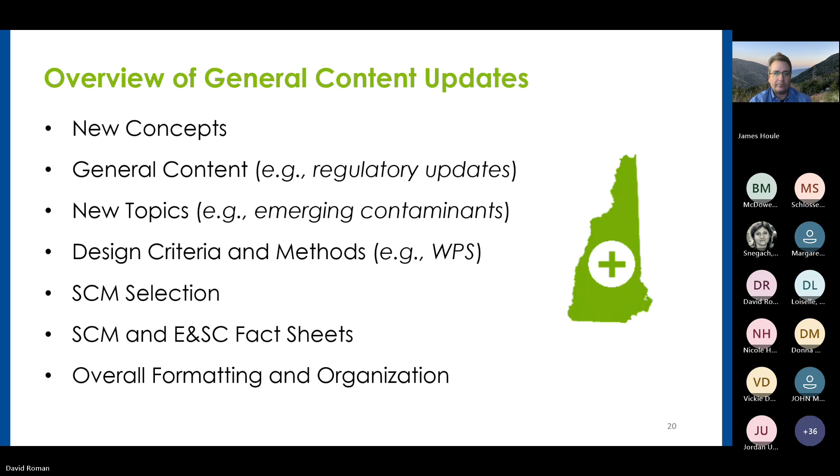Next slide. As far as new concepts, the idea here is it represents what the science is pointing towards as the most effective approaches to manage stormwater. This is guidance, as Deb had mentioned, that can be incorporated into site plan review regulations and other planning regulations and local ordinances that advance water quality goals and help communities meet the challenges of today and future scenarios.

In some cases this represents the future or where the science is going, but in a lot of respects, as hopefully you'll see, it's very consistent with some of the updated documents. In New England, stormwater science changes fast. We're also, in New Hampshire and Massachusetts, non-delegated states, so EPA Region 1 writes our permits for us, and so our permits tend to be more progressive anyway. The guidance in this manual is very consistent with some of those emerging criteria.

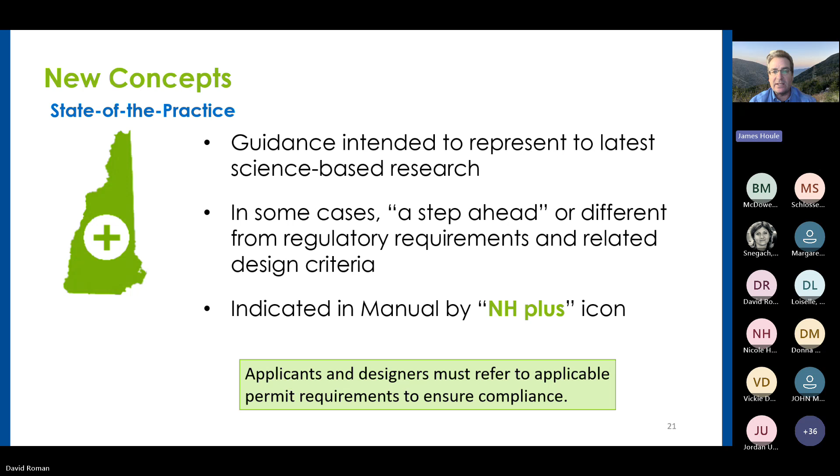We should note that these state-of-the-practice items are identified throughout the manual by this New Hampshire Plus icon. We added that so you understood or were aware that this might go above and beyond what's required. But again, we're looking at this as the most protective elements of stormwater design that are available today. Next slide.

You'll also hear about this watershed protection standard. This is largely guiding on-site stormwater management, or what the old manual referred to as groundwater recharge - that's the primary way to manage on-site rainfall depths. Dave will go into greater detail about what this is referring to. Again, it's very consistent with the updated Mass MS4 permit that came out in 2024. New Hampshire's permit will come out probably sometime this year, and the New Hampshire and Mass permits, at least the existing ones, are almost identical.

So we really feel like this will be very consistent with the new permit as well. And it's also consistent with the recently updated Mass draft manual that has a 1-inch retention standard. We are calling this a watershed protection standard because we're engaging new modeling and up-to-date ways to model this on-site retention. And we develop resources, as you'll see, to help you and guide you through that. So we really hope that we're making this as easy as possible to adopt and provide tools to engineers and designers that are going to be doing this throughout your municipality or throughout your jurisdiction.

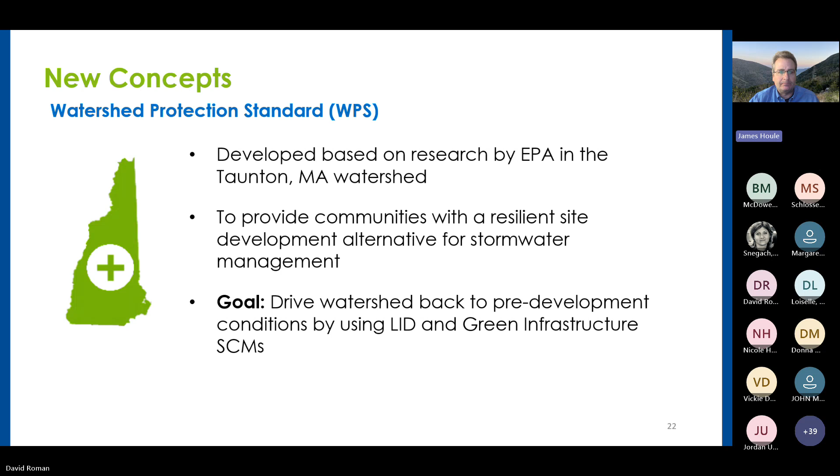Of course, in any updated field, the acronyms are how we measure our success sometimes. We are adopting a new acronym for best management practice, and that's called stormwater control measure. Why? It's mainly because EPA has adopted this as well. And if you look across some of the other updated manuals, they're all moving towards stormwater control measure. It's a little bit more precise. Best management practice is a very vague and open term. These things are still applicable to erosion and sediment control practices, but the structural and non-structural practices for post-construction, which we'll spend the majority of our time going over, needed a little bit of an acronym update. So that's what we're calling stormwater control measures. Next slide.

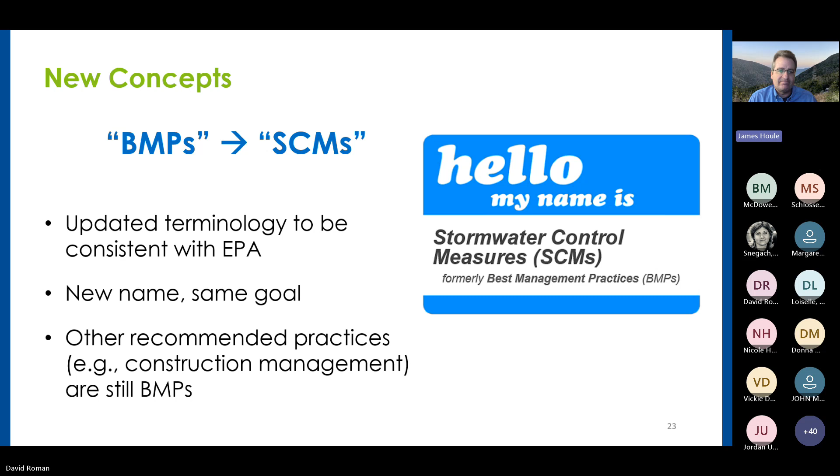And as I mentioned, we don't do this work in a vacuum. It is very integrated with other things that are happening in New England and very tied to the updated alteration of terrain guidance or regulations that are out there. The recently updated construction general permit, the EPA CGP, that governs construction activities, and then the MS4 permit. So the 2017 New Hampshire and 2016 Mass permit, which again, like I said, are written by EPA Region 1 and are almost identical because Mass and New Hampshire are 2 of the 3 remaining non-delegated states.

And as I mentioned, it's also very consistent with the draft 2024 EPA Mass MS4 permit, in addition to some of the other things that we've seen emerge since, like the residual designation or the CII, the commercial, industrial, and institutional permit that came out for the three urban watersheds in Massachusetts, the Mystic, the Charles, and the Neponset. Next slide.

As far as new topics go, we address harmful algal blooms. If we look at 2008, when the manual was written, it was largely focused on sediment. Now, I would say in this manual, one of the most dramatic changes is it's very, very focused on nutrients. So phosphorus in inland freshwater areas and nitrogen in coastal areas, as those tend to be the limiting factors for these harmful algal blooms.

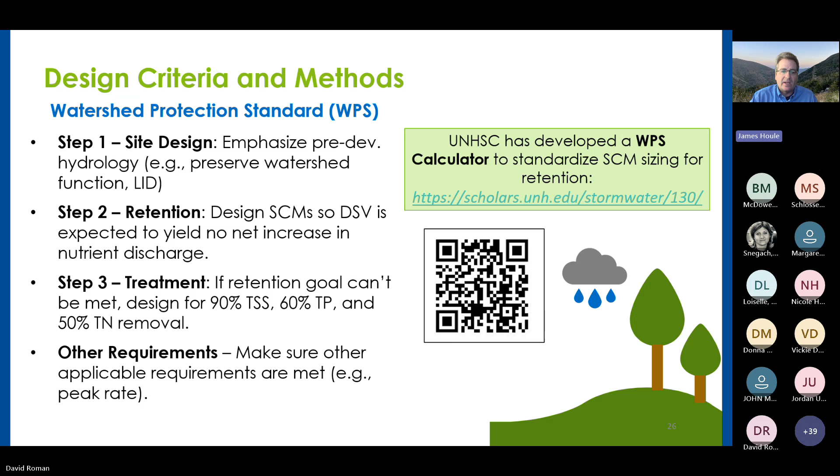So a little bit on the pollutant curves. If you haven't seen these, I'll also drop a link to our website where there's vast amounts of resources that explain the performance curves. These are embodied in Appendix F of the New Hampshire and the Mass MS4 permit, and they really are a more up-to-date way of categorizing and quantifying the load reductions associated with a range of different structural controls.

So if you paid attention to what's really happening throughout the country, you'll see, for instance, the recent Supreme Court case, EPA versus San Francisco. San Francisco was suing EPA over a narrative environmental standard, right? Or maximum extent practicable is something that we talk a lot about here. That's very kind of dubious and hard to nail down. What does that actually mean? And it leads to a lot of ambiguity with respect to the regulated condition.

In New Hampshire and Mass, because EPA Region 1 has been so involved, we're really moving beyond these narrative standards into a numeric criteria. And that numeric criteria embodied in those load reductions, the 90, 60, 50, can all be quantified using these performance curves. So not only are we giving you a numeric criteria, but we're providing ways to calculate that for a range of structural controls across a range of different soil types.

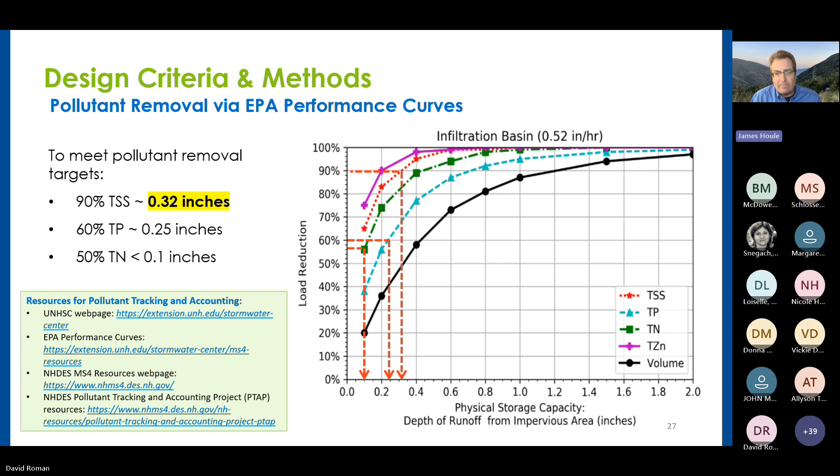For the most part, the water quality volume was a static volume that was plunked into your system. And there's some inefficiencies there just from the modeling perspective. That's not quite how it happens. You know, the 1-inch doesn't just instantaneously fall from the sky and get delivered to your treatment system. So we're using this advanced modeling approach to take advantage of some of these more efficiently modeled hydrologic and hydraulic properties of treatment from these stormwater control measures. Next slide.

When it comes to climate change or addressing larger storm volumes, we're moving away from the TP40 and into Atlas 14. AOT has made this change at least 5 years ago for the state. And we're recommending Atlas 14, or the NRCC, Northeast Regional Climate Center, or the Cornell Atlas is also something that we accept, but we focus on Atlas 14 because it was a NOAA product, and we were at the time pretty sure that these products would continue to be invested in.

And we know that NOAA is working on Atlas 15, and when and if that becomes available, we will update this guidance in the subsequent 2 years. We're also looking at this fitted value, which is the middle value. So when you look at these charts, we're focusing on these 24-hour return intervals to define the controls for the 2, the 10, the 25, and the 50-year event. And we're focusing on that fitted value. The other two values you see are the upper confidence interval and the lower confidence interval.

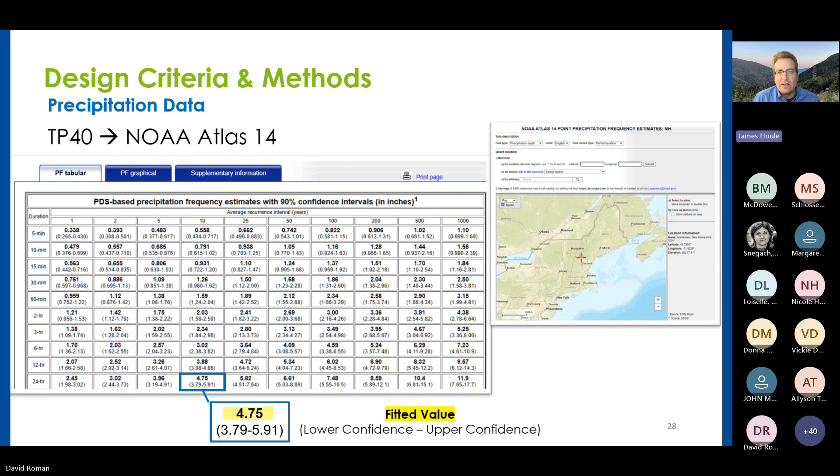And so if you wanted more control, I guess you could adopt the upper confidence interval, like has been proposed in Massachusetts. We just felt using that fitted value is still a viable approach as long as you're using an updated rainfall atlas. Next slide.

All right, and then rounding this out, we've also added tiers to help you identify and target different stormwater controls. So way back prior to the 2008 update, when we were using the New Hampshire Green Book, it was just provide stormwater controls and provide peak flow control. The 2008 handbook really advanced this water quality requirement and the water quality volume. And we said, in order to target that, it's best to use filtration and infiltration systems. Now we're defining that even more clearly. Instead of just filtration and infiltration systems, we're separating these into tiers.

Tier 1 being systems that can typically be designed to meet all the requirements. So watershed protection standard or the pollutant load reduction requirements, groundwater recharge requirements, and peak flow as well. So they can be designed to meet everything. Tier 2 might be systems that can meet one or more of the criteria. And for these, I particularly think of systems that might not infiltrate. If you're dealing with restrictive soils or you're not infiltrating, then you're unable to meet either a groundwater recharge requirement or a retention standard. So tier 2 might provide treatment for one or more, but not all of these controls that we're looking for.

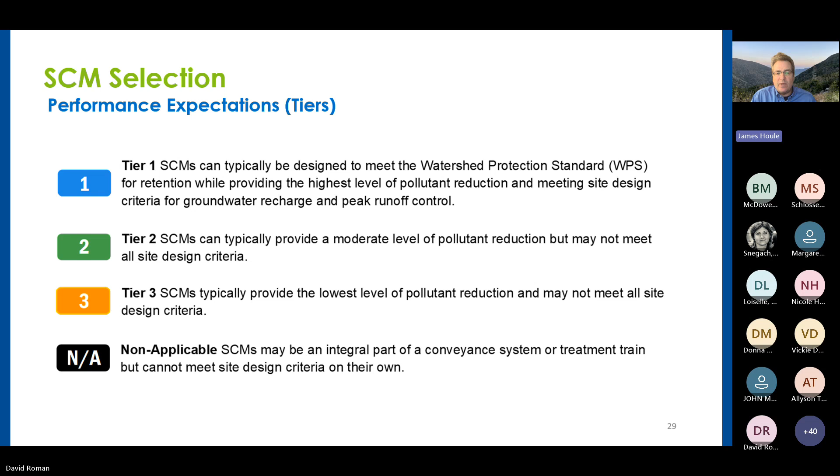And then tier 3 stormwater controls are things that are kind of falling out of favor. It offers the lowest level of pollutant reduction and shouldn't really be considered as primary treatment. And then there's non-applicable. These are things that we just can't really calculate or quantify and might be part of your treatment train or your overall management system, but in and of themselves wouldn't really yield or add to any of those more numeric requirements.

So bioretention systems—and note it says infiltrating, not to be confused with biofiltration that might not infiltrate, which would probably be classified as a tier 2. Gravel wetlands, you see, are tier 2, even though they're one of the top performers for water quality, because by their nature they have a restrictive subgrade or subbase, so infiltration isn't really required. That's to maintain an internal storage reservoir, so they wouldn't really be able to meet groundwater recharge. You could couple them with other systems to do that in tandem, but alone they couldn't meet the groundwater recharge requirements.

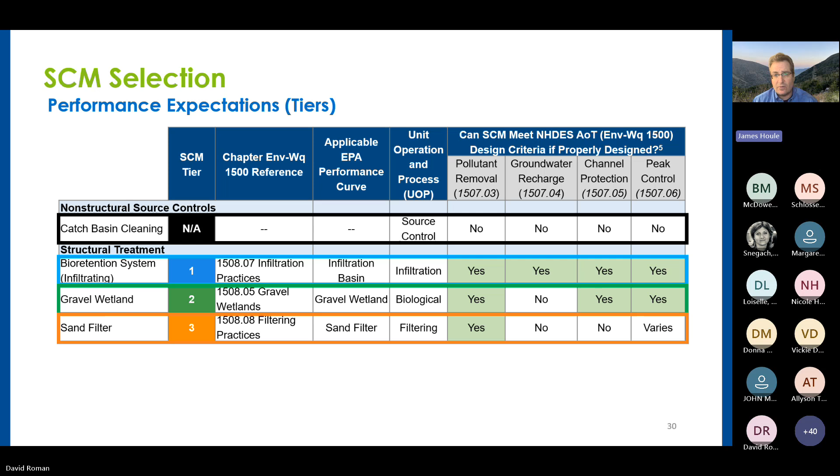And then sand filters, which are tier 3. These are things that have been in the literature but have fallen out of favor. Sand filters are kind of an enigma to me, unless they're manufactured. Sand filters often become bioretention systems, so we're classifying them as tier 3 anyway. And you can see as you move to the right here, we have all the attendant alteration of terrain requirements and the ability of these structural controls to meet those.

Here is a look at general nitrogen, phosphorus, sediment, metals, and bacteria removal for these systems. A bioretention system that infiltrates can meet all those—that's your tier 1 system. A bioretention system that doesn't infiltrate, that's lined, or in soils not suitable for infiltration, probably couldn't get the full range of water quality benefits. Then you can look at things like extended detention, which historically we relied on significantly, and as you can see, it doesn't have the capacity to deal with many of the updated water quality parameters.

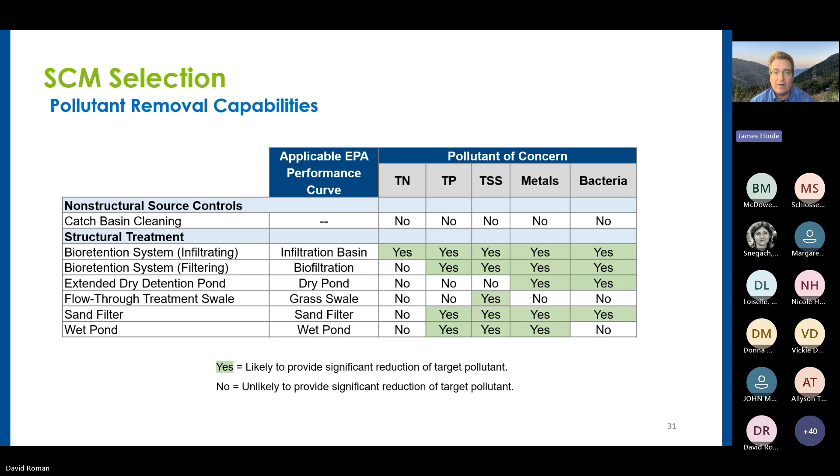One of the best components, I think, are in our appendices. We've updated not only the descriptions of the stormwater control measures, these structural controls, but also the graphics—very near and dear to my heart, because I got pretty tired of looking at old depictions of these systems, begged and borrowed and stolen from various manuals throughout the country that didn't accurately reflect what these systems look like. So we developed new schematics that accurately reflect what these actually look like in the field. In this case, you're looking at a bioretention system, and notice it has an elevated underdrain—we're not putting the underdrain at the bottom, and that is to enhance infiltration.

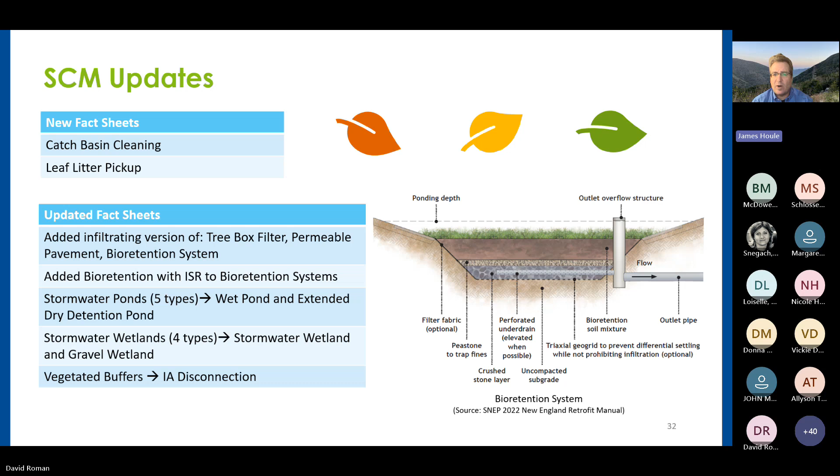So the updates to the stormwater control measures, the graphics, and the fact sheets in Appendix A are probably one of the best attributes of this manual.

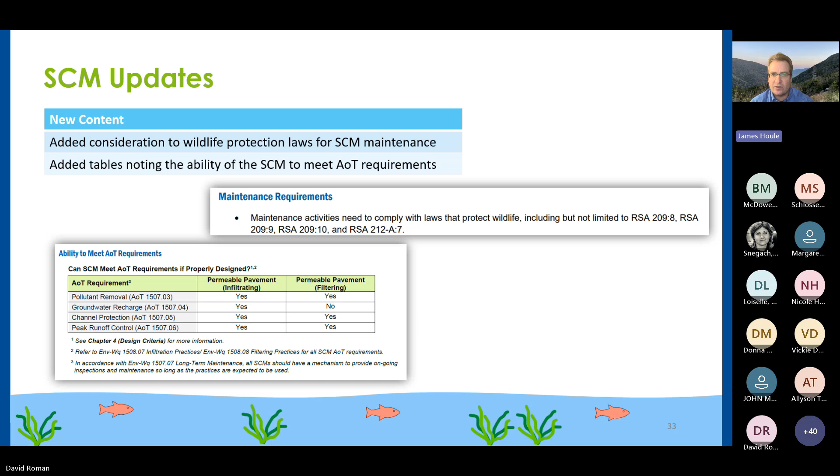As far as new content, we've added things around inspection and maintenance, and the associated requirements. Inspection and maintenance is something I think we have a lot of progress to make on moving into the future. But if you are maintaining these systems, you still have to meet some of the existing RSAs. We've seen some maintenance done at times that disturb wildlife, and other times that might not be conducive to maintaining proper habitat and respecting wildlife cycling. So you're still having to meet some of these other RSAs associated with disturbance overall.

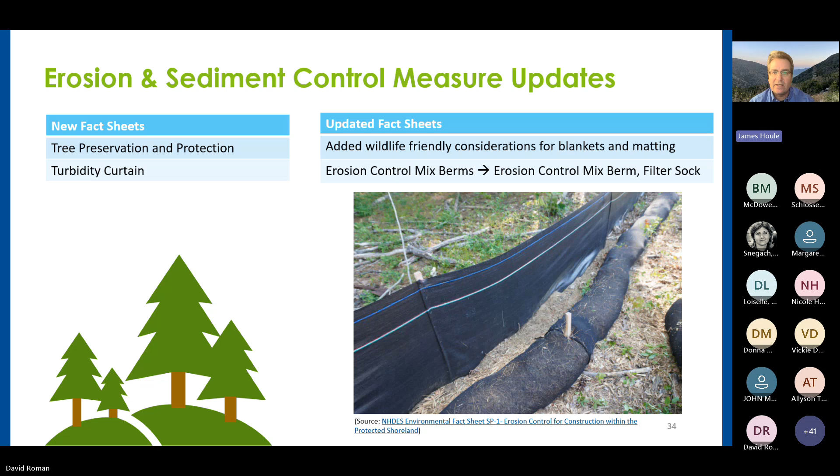Appendix B is erosion and sediment control measures. We did update this—we've eliminated straw bales as a BMP for erosion and sediment control, and advanced newer practices like mulch berms or filter sock berms, potentially in combination, but hopefully not silt fence alone. We think moving into the future there'll be a lot more updates on erosion sediment control practices going into the year 2 review. This is all in Appendix B, with updates consistent with the 2022 construction general permit issued from EPA.

As far as formatting changes, it used to be three manuals; now it's one manual. It used to be printed; now it's available online—we're moving into the digital age. You can print it yourself, we just haven't printed hard copies. So it exists online as a digital resource, encompassing all the benefits of that, with hyperlinks all active and linked to various other resources accessible through the document.

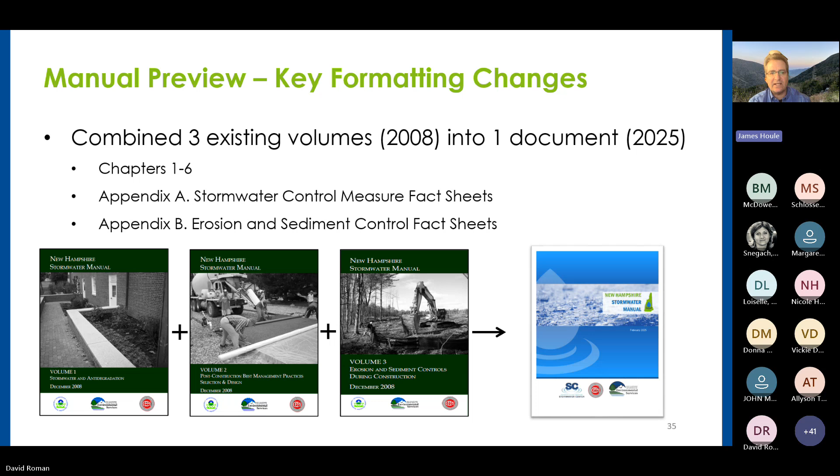Again, some of the look and feel has changed too. There's a new color scheme, searchable headings, and examples. The New Hampshire Plus icon, like I said, denotes things that are more of the latest and greatest research. Call-out boxes for key concepts and standardized example calculation boxes. And yeah, flip it one more time.

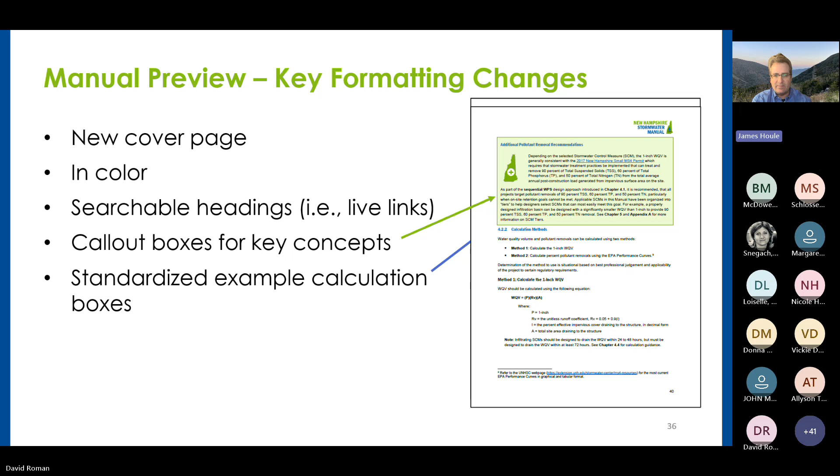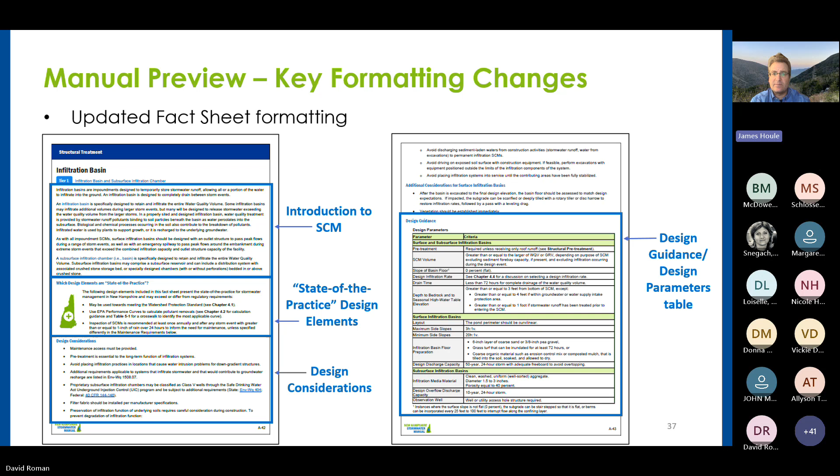And again, in Appendix B, we've completely restructured the fact sheets for all the different structural controls. So it has updated formatting, and it has all kinds of information about the expected performance, design considerations, maintenance considerations, and still a lot of useful updated information that's very specific to each structural control measure category.

Next slide. And yeah, updated maintenance requirements and updated schematics, which again is something that I was very happy about.

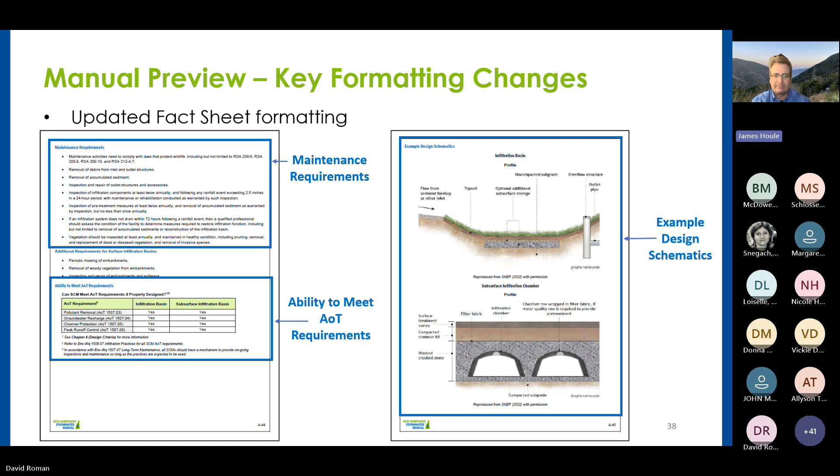All right, so this is where I handed it to you. All right, thank you, Jamie, thank you for that overview of the manual. Now we'll go a bit more into the weeds here, and we'll talk about the alteration of terrain. So basically, how does the manual connect to AOT?

Oops, next slide. Okay, so as Jamie and Deb both mentioned, the manual is not a regulatory document. So all AOT requirements are not included in the manual, and designers should directly reference regulations, such as the AOT. But that being said, there are several references and connections to AOT that the manual makes.

So this table here is showing just a sample of some of those topics, some of the key topics here. Like an overview of AOT, where that references in the AOT program, where it is in the manual, and there's several references to different design criteria for AOT.

So the manual covers this in detail - how to do the water quality volume, how to do groundwater recharge calculations, channel protection, peak runoff control, and what the different AOT documentation requirements are. So there's definitely lots of connections that the manual makes to AOT.

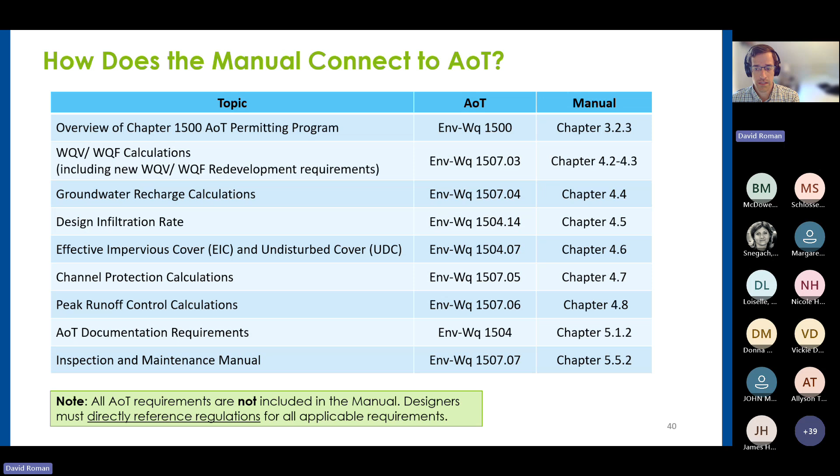And there's some other places where this is shown. So as Jamie went over the SCM table earlier, we have a table that shows all the different SCMs, what their tier is, and it also talks about whether or not that SCM could meet AOT criteria - for example, for pollutant removal, recharge, channel protection, or peak control. So in this case, an infiltrating bioretention system would be expected to meet all of those criteria.

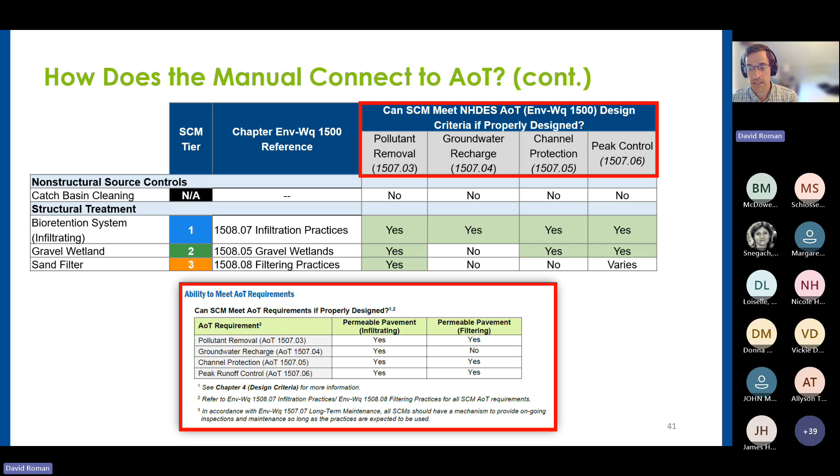And then there's a table also in Appendix A for each individual SCM fact sheet, which also just indicates whether or not it could meet those AOT design criteria.

This table here is showing some of the differences in how AOT handles different design criteria versus the state of the practice guidance in the manual. So you'll notice, for different SCM design elements, AOT has more traditional design elements, whereas the manual has the call-out with the New Hampshire Plus icon for different state of the practice elements. And I'll go into some of those examples in the next couple of slides.

Same thing for pollutant removal and groundwater recharge. AOT has that 1-inch water quality volume requirement, and then just some specifics for how to handle total phosphorus and nitrogen. The state of the practice recommendations in the manual try to simplify things and just recommend that sequential watershed protection standard design approach that Jamie went over. And same thing for the groundwater recharge, and I'll go over some examples in the next couple slides.

For peak runoff control, the AOT requirements are that the post-development peak discharge is less than the pre-development for the 10 and the 50-year 24-hour storms. The manual state of the practice guidance basically has some recommendations in there just to consider designing to a higher rainfall depth, such as the 100-year storm.

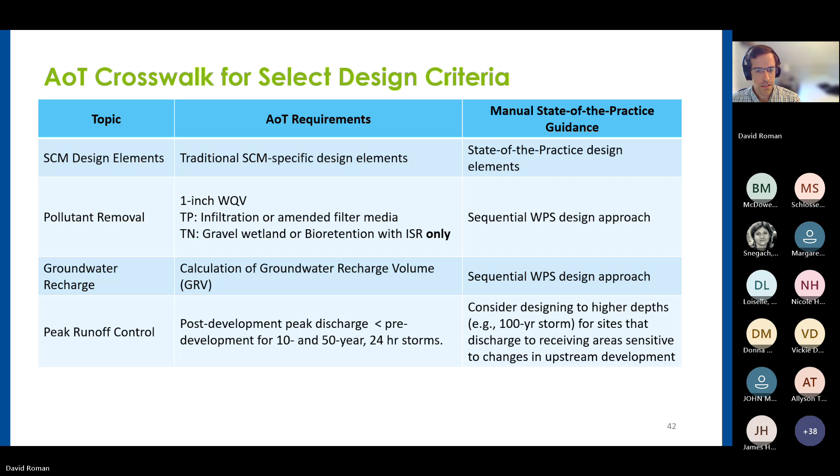Okay, as Jamie mentioned earlier, the manual has the state of the practice icon here. And that's just going to identify any criteria in the manual that would exceed or differ from AOT requirements.

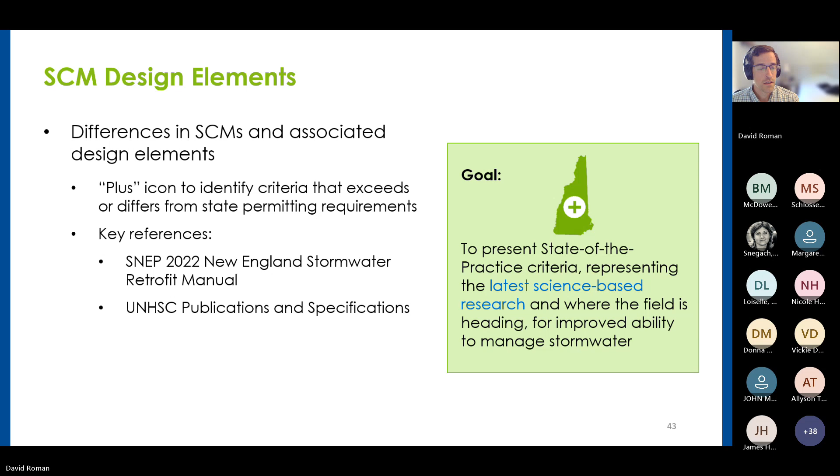All right, now we'll go into some examples here. So we'll go into some examples of looking at the AOT requirements versus the manual state of the practice recommendations. So we'll start off with gravel wetlands.

So the AOT requirements are generally very prescriptive on how to size these things. One example is having 2 treatment bays, each of which can filter a certain amount of water quality volume. The manual state of the practice simplifies some things here, basically just indicating to use those EPA performance curves to calculate the pollutant removals.

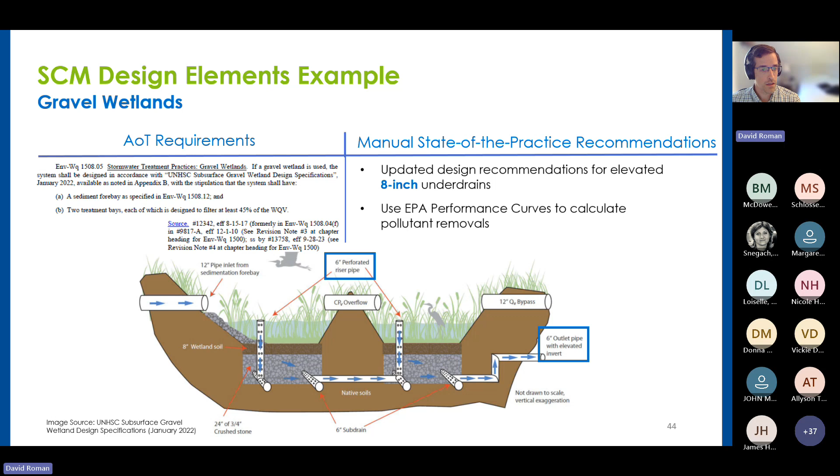As we go into bioretention systems, here's just one example of a filtering bioretention system. So the AOT requirements have some requirements about having filter media depth, different mixtures, and then there's some vegetation requirements from 1988.

So the manual just updates this, recommending to use the 2021 Stormwater Center bioretention soil mix specification. There's some different recommendations on the depth of the soil mixture depending on the planned vegetation survival.

There's also brand new planting guidance. So looking at New Hampshire specific guidance, it's set up for different things, like if you want to use plants for more shade versus sun versus salt tolerant. So it's been completely revamped.

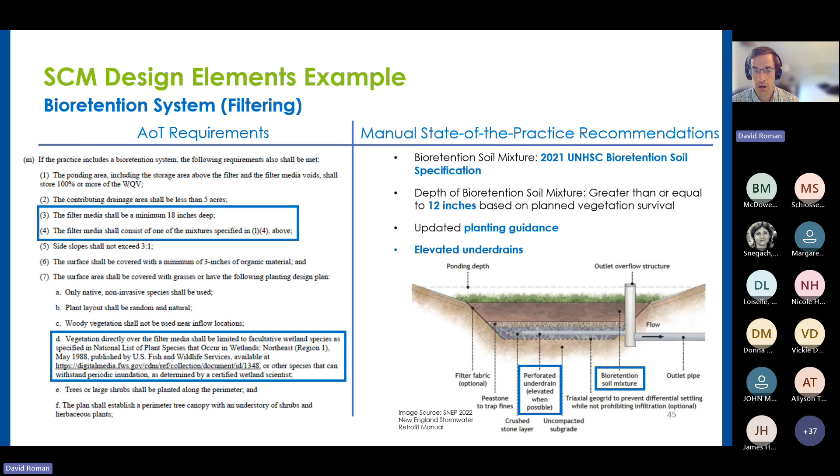And then, as Jamie mentioned, under drains are definitely important. Under drains can cause a lot of benefits in basically improving water quality and hydrologic performance. So by raising that under drain up just a little bit, we can really enhance increased infiltration, which would then result in greater runoff reduction and just a slew of other benefits.

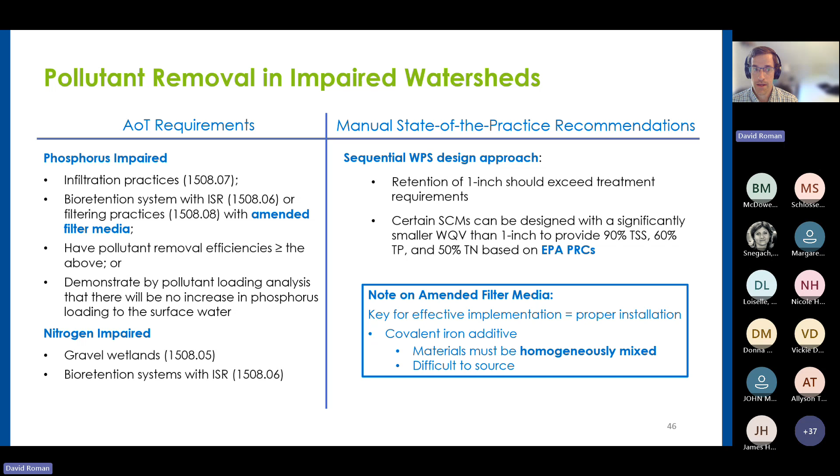So for pollutant removal, the AOT has several requirements for phosphorus impaired as well as nitrogen impaired watersheds. The state of the practice recommendations tries to simplify this by going for that sequential watershed protection standard design approach. The idea is that the WPS would meet the 1-inch retention, which would then exceed any treatment requirements for that there are.

Groundwater recharge is similar. The AOT requires that the groundwater recharge volume be calculated based on hydrologic soil group, and then each soil group would have a target recharge depth. So soil group A would have a target of 0.4 inches. The manual just recommends using the WPS, which will get you to that 1-inch recharge volume, meeting or exceeding the AOT requirements. And with that, I will invite Mike just to talk a little bit about some of the other AOT pieces.

Thank you. Yeah, so as previously noted, the Alteration of Terrain Bureau worked closely with the Stormwater Group during the development of the Stormwater Manual, and we're in full support of it and its contents. Also noted, we are a regulatory agency, so the rules will take some time to catch up to any of the newer stuff that's in the manual.

So, in the meantime, I would encourage you to use a waiver. We do have a waiver process that you could submit a waiver request with your application if you are proposing something that's not currently allowed in rule, but is an option in the Stormwater Manual.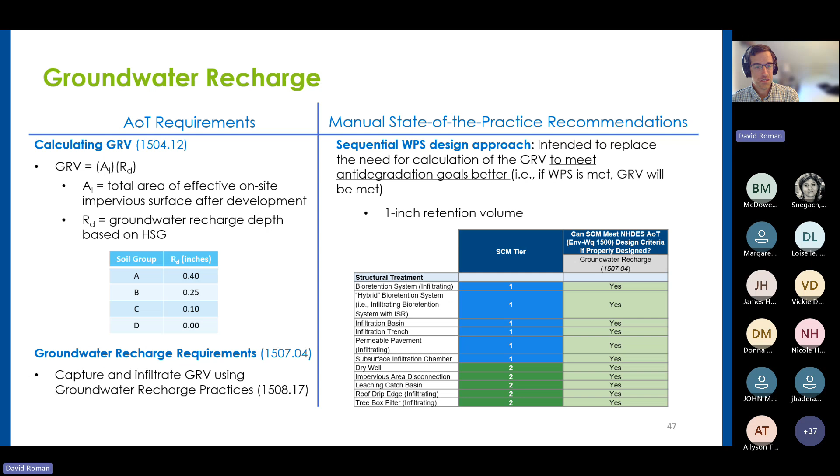All right, so now we'll move on to some technical examples. We'll get a little bit into the weeds here, but hopefully not too much, we'll try to keep it high level. The idea here is just to show some examples of how the design criteria could work in practice for sizing an SCM.

So let's just imagine that we have a really simple project site. It's 1 acre, an existing forested site, and you want to turn this site into a parking lot. So we'll make it into a completely impervious parking lot. We're going to put an infiltration SCM over here on the right-hand side to capture the runoff from that parking lot.

So we want to figure out what the required design storage volume of this proposed infiltration basin will be to meet different design criteria. We'll look at the watershed protection standard, the groundwater recharge volume, and then pollutant removals. And just for simplicity, we'll assume that soil testing has been done at the location of the infiltration SCM, determined to be soil group B, which has a hydraulic conductivity of 1.02 inches per hour.

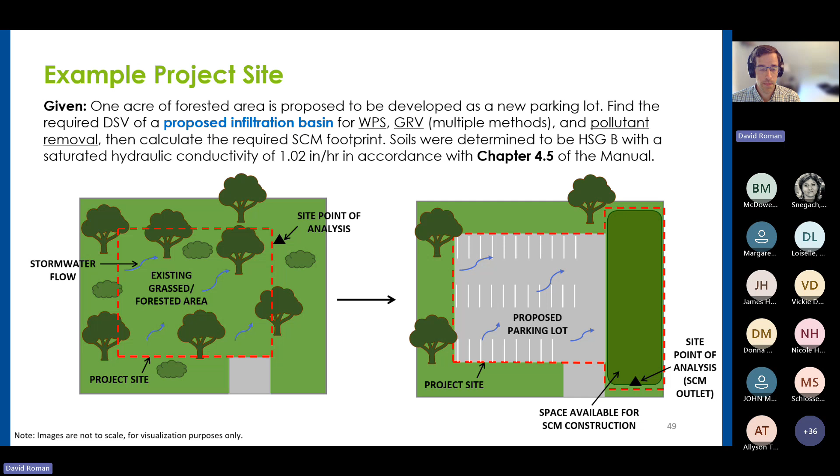So we'll start off with the watershed protection standard. As Jamie mentioned earlier, the UNH Stormwater Center has built a WPS calculator tool.

So this is just an Excel-based tool, and it really simplifies the process quite a bit. You start off with your inputs: your site name, your impervious area. There's a drop-down menu where you can select your SCM. In this case, we would select surface infiltration, and we can put in our infiltration rate right here.

I should note I'm just showing an example for one SCM in one drainage area. If you have a more complicated site, this spreadsheet tool expands for a lot more SCMs—it's got space for up to 10 or so. Once you've got your inputs, it's going to work some magic in the background and come up with the required design storage volume to meet the watershed protection standard.

What's exciting about this calculator, and about this in general, is that the static retention goal is 1 inch. But because the WPS has been built using continuous simulation methods, we can essentially make the sizing smaller. In this case, we've got a physical storage capacity of 0.6 inches as opposed to that 1 inch, and this is still going to meet that 1 inch static retention standard. So basically it just means your SCM is going to be much smaller, more efficient.

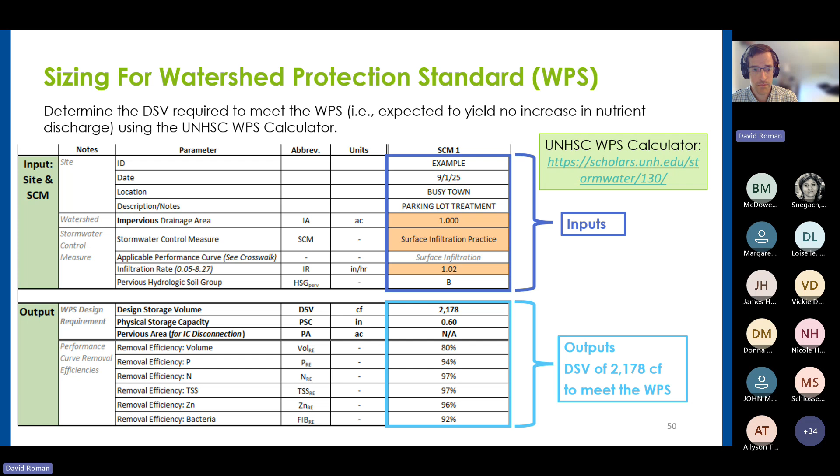Okay, so the EPA performance curves that Jamie went over—I'll just go over a quick example of how that would work for sizing our example SCM. We want to come up with the design storage volume to meet 90% TSS, 60% phosphorus, 50% nitrogen removal. So we draw some arrows on the curves here to our desired load reduction, in this case 90% for TSS, and figure out what runoff depth this has to capture from the upstream impervious area. In this case, it's about 0.18 inches.

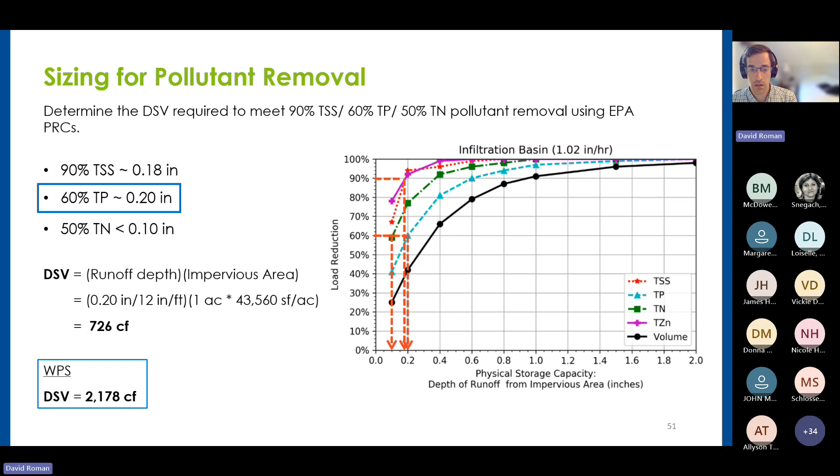We do the same thing for phosphorus and nitrogen, and what we want to do is just choose the largest one. That shows this is going to meet the 60% phosphorus removal standard, and will slightly exceed TSS and nitrogen. This ends up with a design storage volume of just 726 cubic feet, which is a lot smaller than the watershed protection standard. So if you're just sizing for pollutant removal, the overall storage volume of that SCM can be a lot smaller.

Now we can go into sizing for groundwater recharge, and I'll go over several different methods here. The first one is AOT, which is calculated based on the amount of impervious surface and the required depth of runoff, based on the hydrologic soil group. In this case, it's B soils, so that gives a target recharge of 0.25 inches.

So we end up with a required design storage volume of 908 cubic feet—about half the size of the watershed standard.

There's a couple other ways to calculate recharge. Massachusetts has a static sizing method with a target depth factor of 1 inch across the board, which will likely change to 0.8 inches based on public comments, but that regulation isn't out yet. The idea is you take your target depth factor of 1 inch, multiply by the impervious area, and you get 3,600 cubic feet—by far the largest required design storage volume.

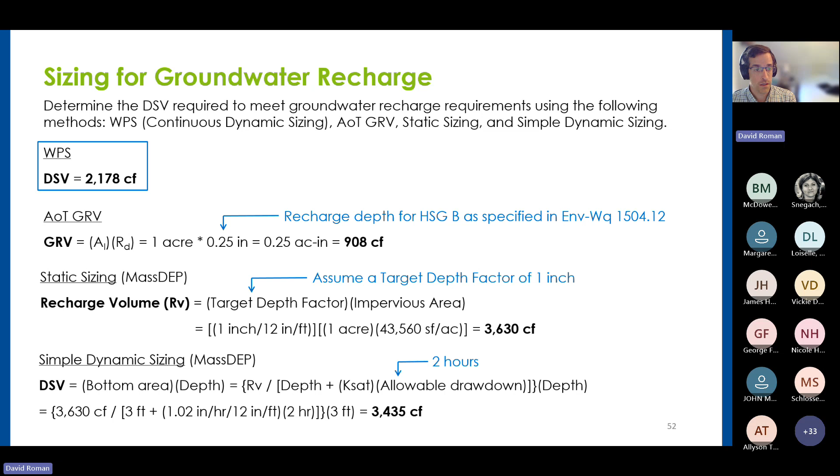There's another method in Massachusetts called the simple dynamic method, where you can calculate your design storage volume as a function of the bottom area of the SCM, the depth, and the hydraulic conductivity. That can decrease your required sizing by just a little bit, going from 3,600 to 3,400 cubic feet. So what this shows us is that static sizing results in the largest SCM footprint by a long shot, and then simple dynamic will marginally decrease your SCM footprint.

And then the watershed protection standard, which uses those long-term continuous simulations, you're going to end up with a design storage volume of about 2,000 cubic feet. So again, it kind of shows that just by doing some more sophisticated modeling, your SCM can meet the same goals as static sizing by using this WPS tool.

And then the AOT groundwater recharge volume is the smallest. So if you were to design your SCM to meet the WPS, you will effectively meet the AOT as well.

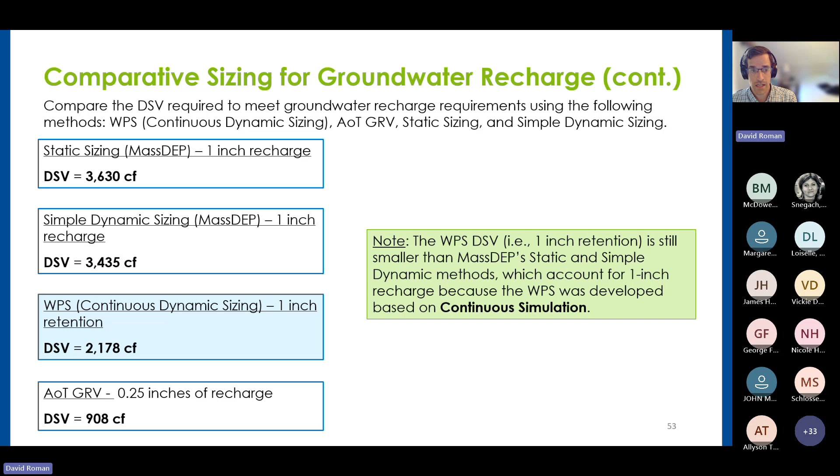All right, so now we know all of our required design storage volumes for all these different design criteria. So if we want to meet all the design criteria, the WPS is the largest volume, so we'll size our SCM based on the WPS. And again, if for some reason there's not space on the site to meet the WPS, maybe there's poor soils, the groundwater table is too high, then the whole idea is that this is a stepwise process. So if you can't meet the WPS, then you go to the pollutant removal for your sizing. So there's a lot of different ways you can size an SCM, but there's one really simple way: using the New Hampshire MS4 permit.

There's basically just a table in there which shows the different sizing calcs for different SCMs. So in this case, we can size our infiltration basin based on that. We'll come up with a length of 40 feet, give it some depth, some gentle side slopes, a bottom width, and then we can essentially plug those into this equation here and come up with a design storage volume of 2,280 cubic feet, which exceeds the required WPS design storage volume. So we're good to go there.

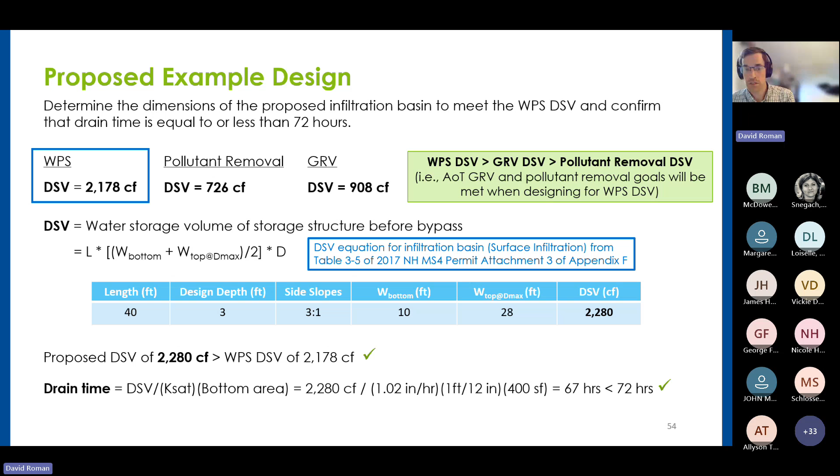And then again, one of the important things to note here is that if you're sizing your SCM to meet the WPS, then by default, you're going to meet the pollutant removal and the groundwater recharge volume standard under AOT.

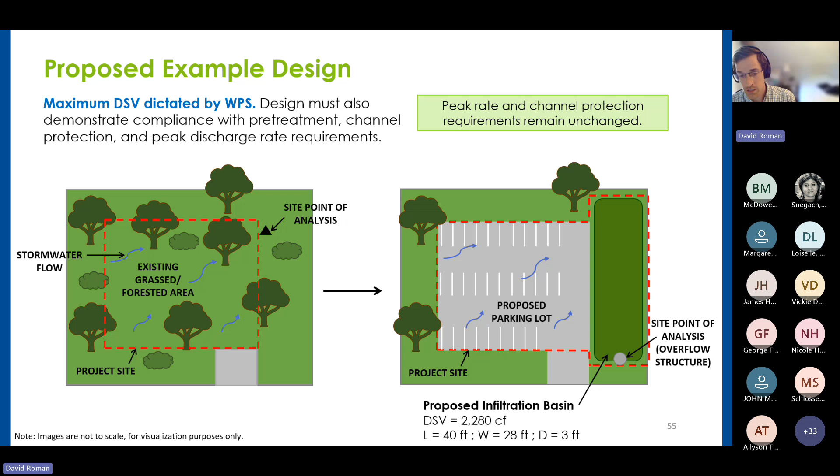One other important thing to note here is I just went through examples of how to meet certain design criteria, but you would also still have to design this SCM to meet the peak rate and the channel protection requirements. So that could change the footprint a little bit, and more than likely it would just require some tweaking of the outlet control structure to make sure those requirements are met. And with that, I'll hand it over to Deb to talk about MS4 compliance and municipal resources.

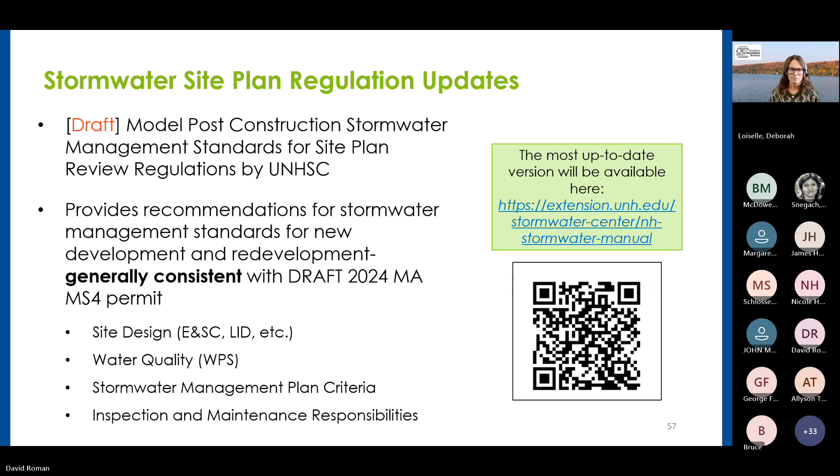Even if you're not an MS4 regulated permittee, I would encourage you to look at these resources because there are some phenomenal tools. We have some great education tools. We have some really good templates that you can use. So I encourage you to check out any of those links.

Municipal stormwater management programs, Jamie alluded to this a little bit earlier. Again, we put a lot of focus on trying to provide everybody holistically some really great tools, whether you're permitted by a state or federal agency or not, and you just are really cognizant about water quality and stormwater management. So in chapter 2, section 2.2.2, you'll find a lot of this information and links contained within.

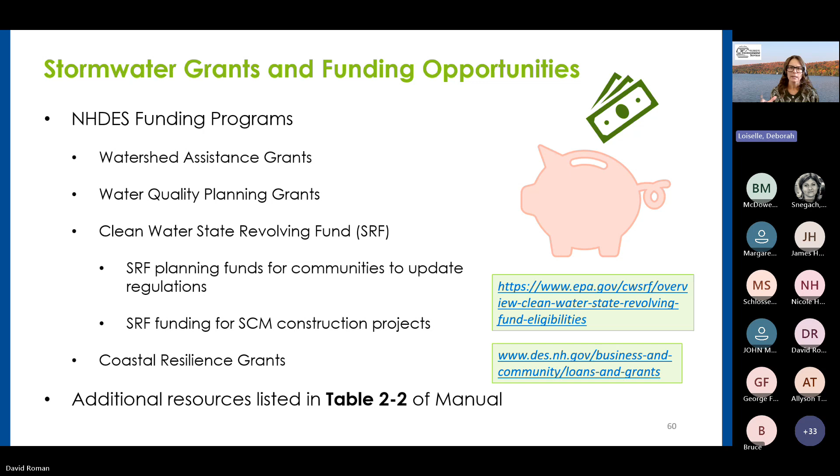As far as New Hampshire DES, we have a few that are managed through our watershed assistance grants. We have water quality planning grants. We also have the Clean Water State Revolving Fund, and then some coastal resilience grants. And again, we have a variety of other potential resources as well. So I just want to talk very briefly about two that I'm very involved with.

The first one is the Clean Water SRF Loan Program. While it is housed and managed through the Wastewater Engineering Bureau, there is a stormwater section. And when we talk stormwater, it's inclusive of non-point source as well. The categories that we provide funding for are asset management, planning, infrastructure with planning components, and infrastructure projects.

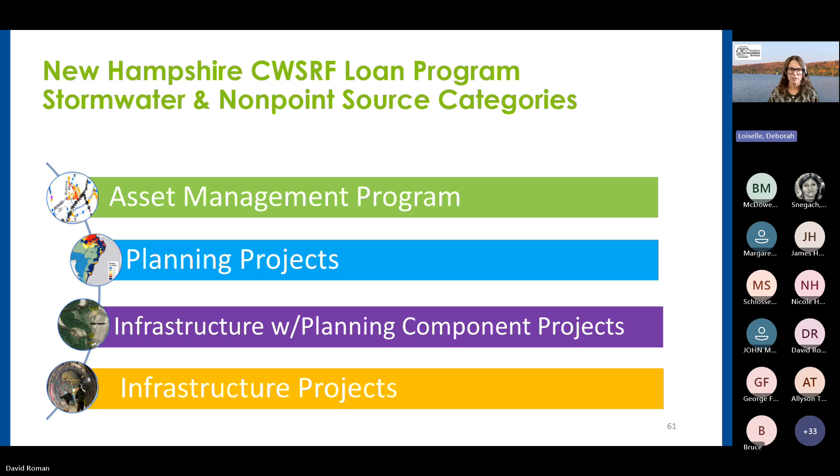So we just finished up our 2025 solicitation. Actually, I just sent out congratulatory letters this week for those that were authorized. I don't have definitive dates for 2026, but I can tell you we're already planning here at DES and getting ready for our 2026 solicitation. So I can give you some general guidance. Our annual solicitation typically occurs around March. That's when we start announcing on our website.

We do blast emails. We have an annual water infrastructure webinar series. It's a week-long series with a lot of really great presentations on a variety of resources and project types, both for the Clean Water SRF program and the Drinking Water SRF program. For the Clean Water SRF program, pre-applications are typically due on or around June 1st. It is a competitive loan process.

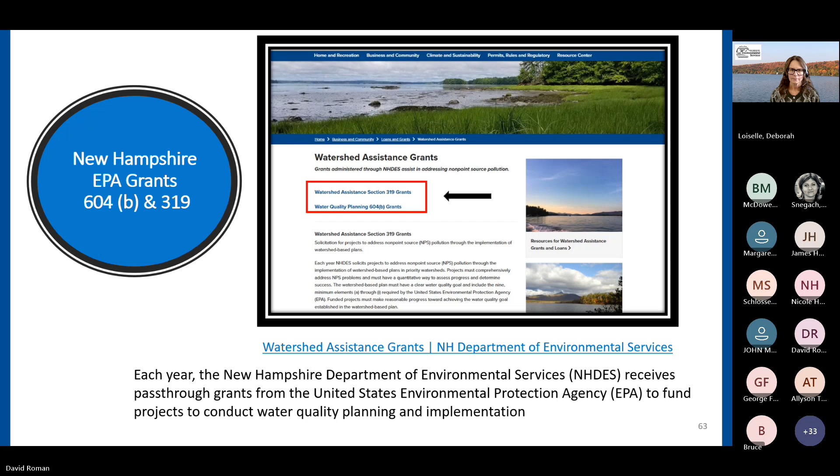So here is some more information. My apologies, that previous slide will bring you right to that web page with additional information. So just so that you're aware, the 604B grants are for planning projects, and then the 319 are for implementation or construction projects. We typically publish this information and announce it on or around late June or early July. However, this year, we are delaying the release because of funding uncertainties. So we're still holding on to this year.

All right, next steps. So effective date of the manual, again, was February 2025. So if any of you are holding on to that old 2008, although we loved it so much, it serves its purpose. But if you have any hard copies or you have any printed copies of 2008, please discard it, recycle appropriately, use it as bookends, whatever. Please use and reference the February 2025 updated manual.